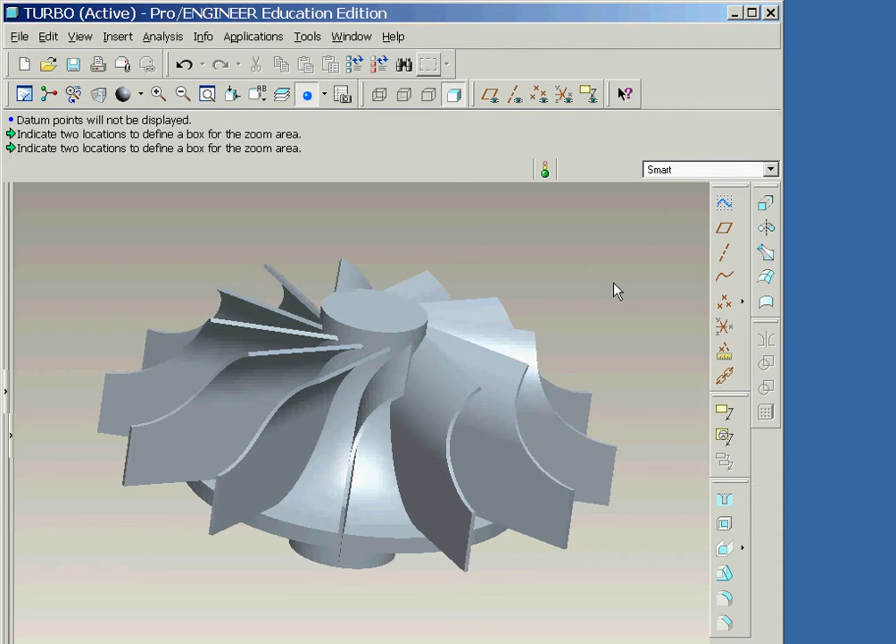We'll begin at a point after having created a revolved feature that represents the hub of our turbocharger fan wheel. We are now ready to create the first fan blade. The blade will be defined as a thickened extrusion, so we'll start by clicking on the Extrude tool icon.

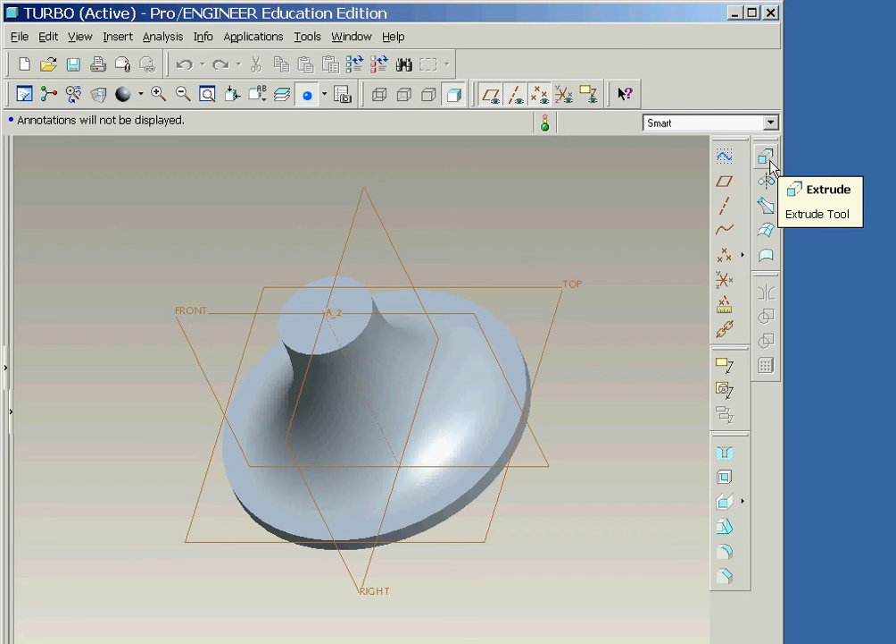Next, we'll click on Placement and Define, and then select the Datum Plane tool icon since we want to create a datum on the fly. In order to constrain the datum plane, we'll first click on the axis of the revolved feature and then hold down the Control key and click on the right datum plane. We'll now set the angle to the new datum plane to be 60 degrees, followed by clicking on the OK button.

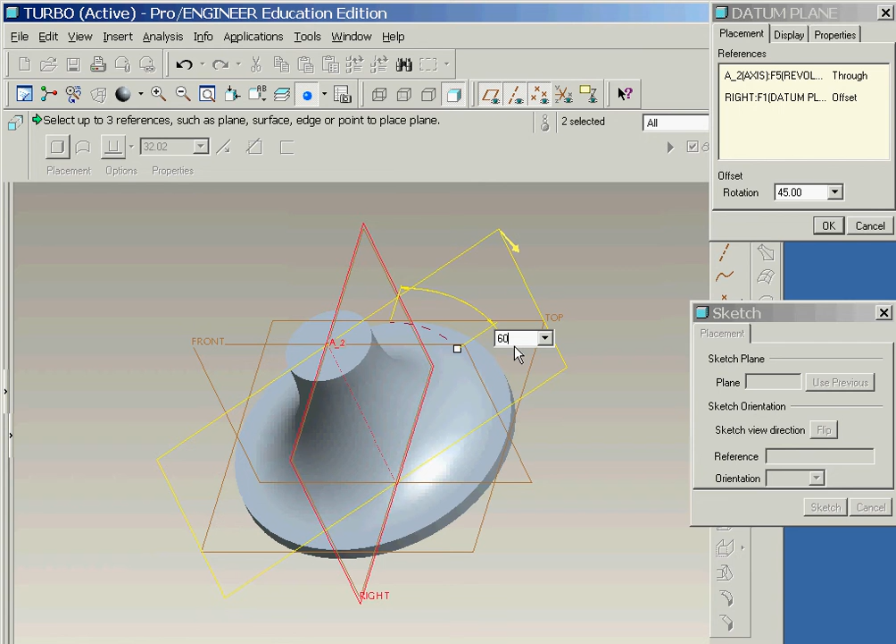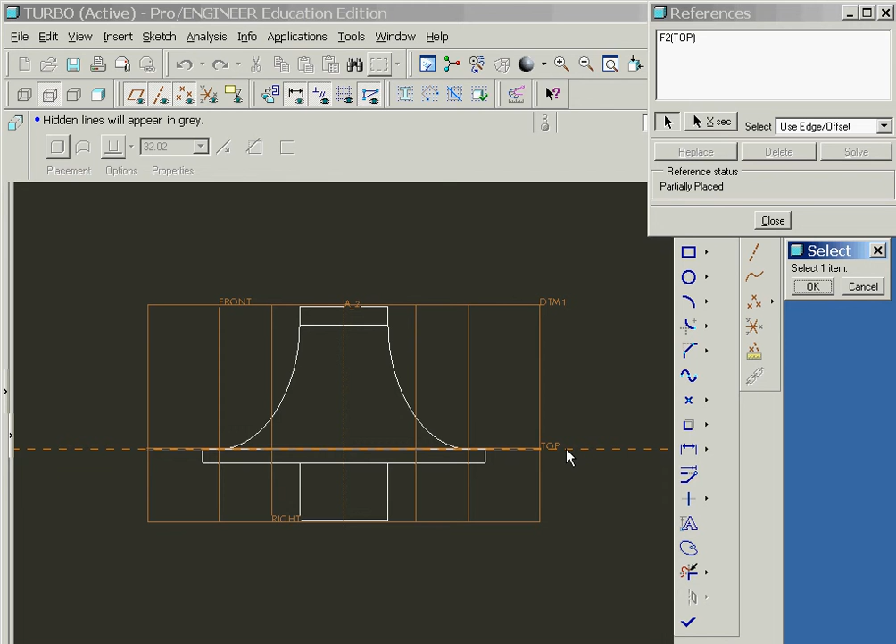We are now returned to the Sketcher setup process, so we'll click on the top datum plane in order to define the reference plane, and then click on the Sketch button. We'll now define our sketching references as the top datum plane, the axis of the revolved feature, and the upper surface of the hub base feature.

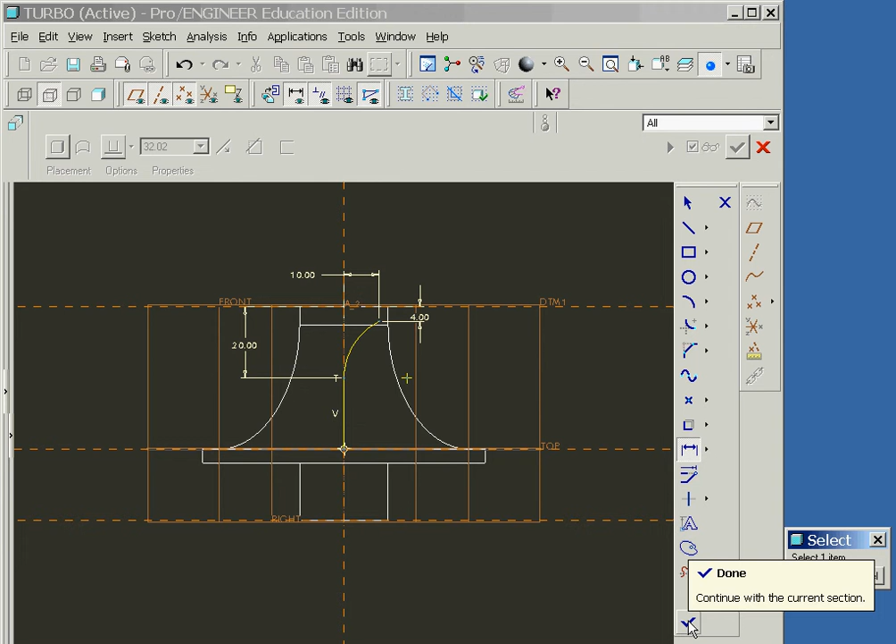We'll now draw the line and the arc shown here, which represents a midline through the blade's profile, and then modify the dimensions to their correct values, followed by selecting the Continue icon. We'll now select the Thicken button in the dashboard, and then key in a thickness of 1. We'll now make sure that the material exists on both sides of the sketch.

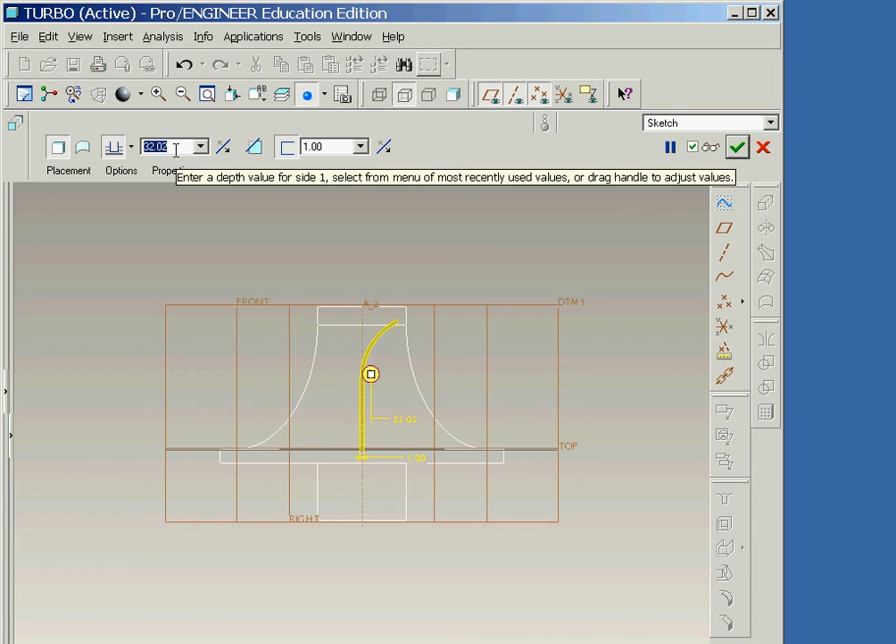And then finally, we'll set the depth specification to 60, and then verify and accept the feature. We'll now quickly move through the creation of a revolved cut that is sketched on another makeDatum sketching plane.

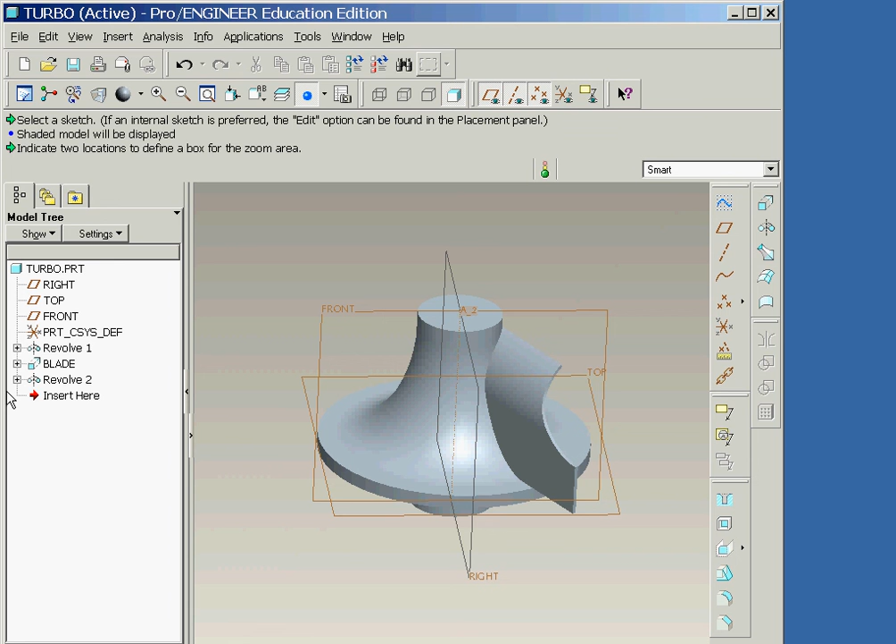We are now ready to create a pattern of blades. We'll start by opening the Model Tree window, and then click on the group that contains the blade. Now we'll right-click the mouse and select the Pattern option. We'll now click on the angle 60, which is the angle to the makeDatum sketching plane.

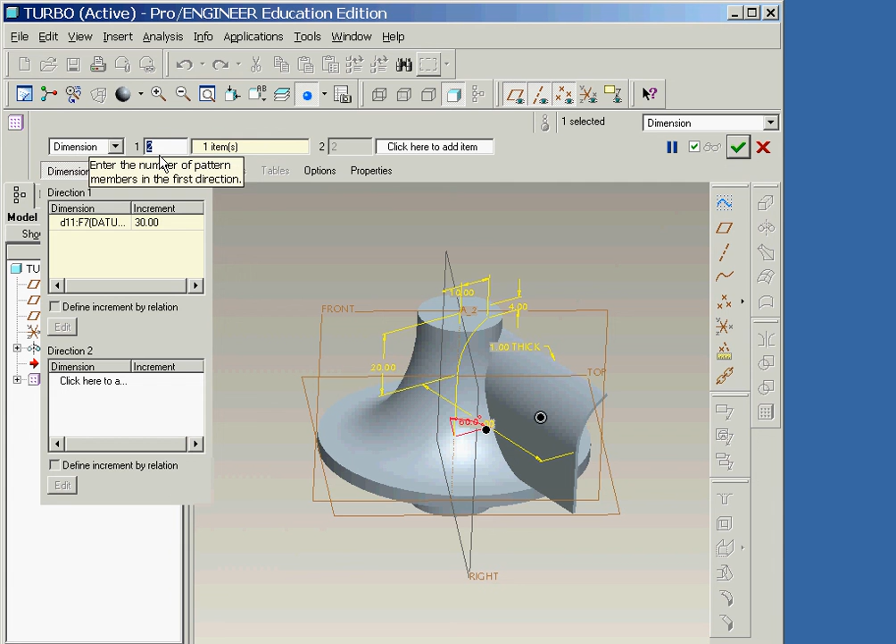Now we'll key in an increment angle of 30. For the number of instances, we will enter a value of 12 in the dashboard area, and then click on the Accept icon. As you can see, we now have a pattern of 12 blades.